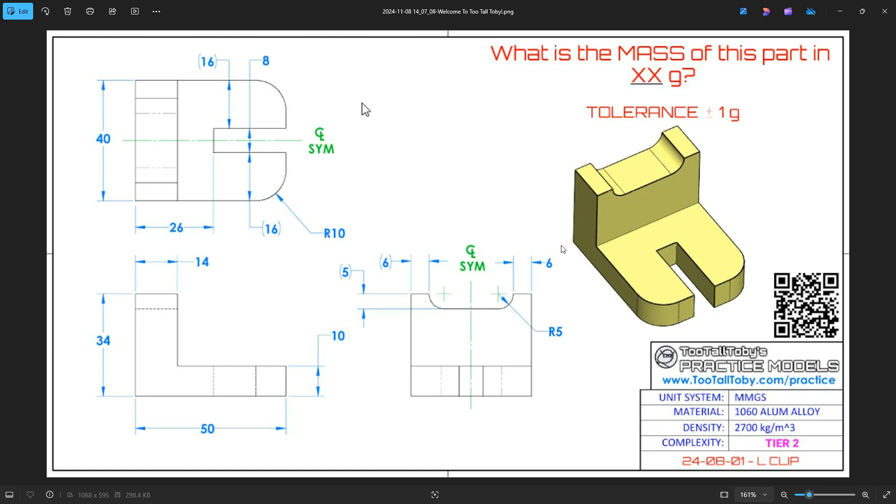We'll do this all in IronCAD. We won't use any sketches, so we'll just hop over and show you how this is done. I moved this over to the other screen so I can see the values, but basically we're going to start off with an extrude shape here.

We know the width of this is 40 millimeters, so we have a handle that's highlighted yellow there telling you which one's moving. That's going to be the width of that part. We know the length of this is 50 millimeters, so it moves to the back one, and then the top, we're going to set the base, which is 10 millimeters. So that gives us the starting point for that.

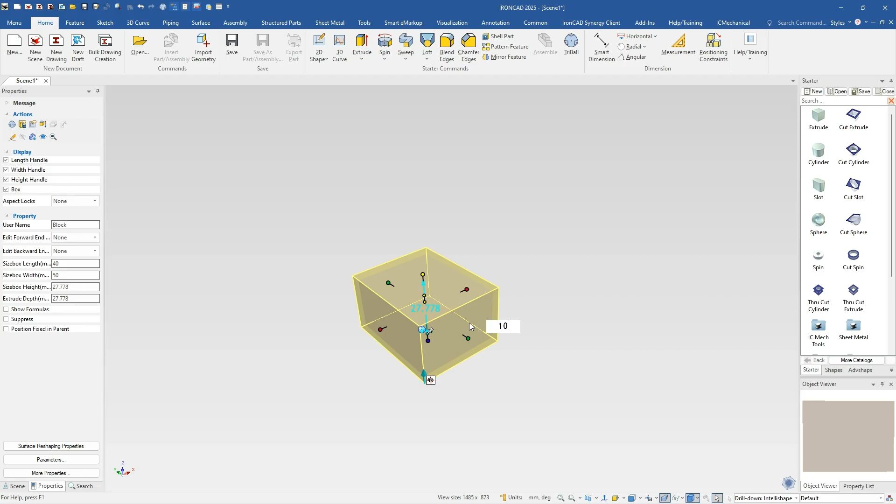We can go and drag up another shape here, then size it and snap it to everything, but there's another way to do this as well to get the extrusion on the top: just select to the face level. You'll have a handle, and you can pull that up. That's going to be basically 34 total, and we have a 10 on the bottom, so it's going to be 24 for that value.

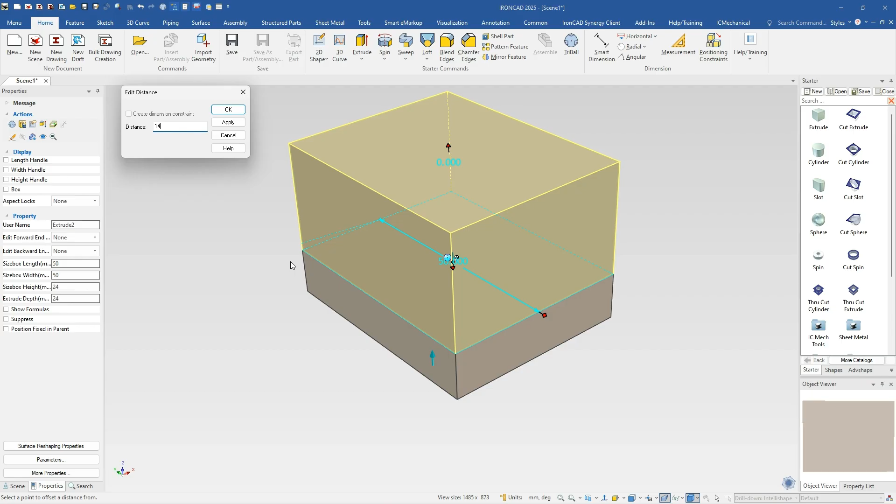Then we can take this other handle and just right click on it and say edit distance from a point, which is going to be this back edge here. We know that the thickness of this is 14 millimeters. So that's an easy way to get everything aligned up very quickly.

Next, we'll go ahead and add this cutout. I'm just going to rotate it down here a little bit so that our extrude goes down, and we're going to drop an extrude cut right on the middle of this part.

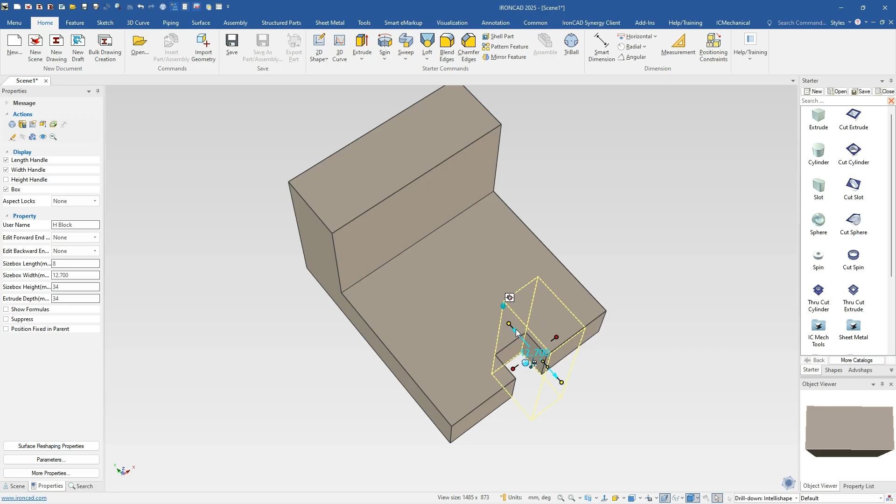We know the width of this, if we right click and size this, is going to be a width of 8 millimeters there. And we know the distance on the back side here, this back edge, is going to be a distance from a point again, same thing as before.

In this case, they gave us the 26 millimeters. So they didn't really give us this actual edge length here, they just gave us distance from here to here. So we can quickly do that with our handles.

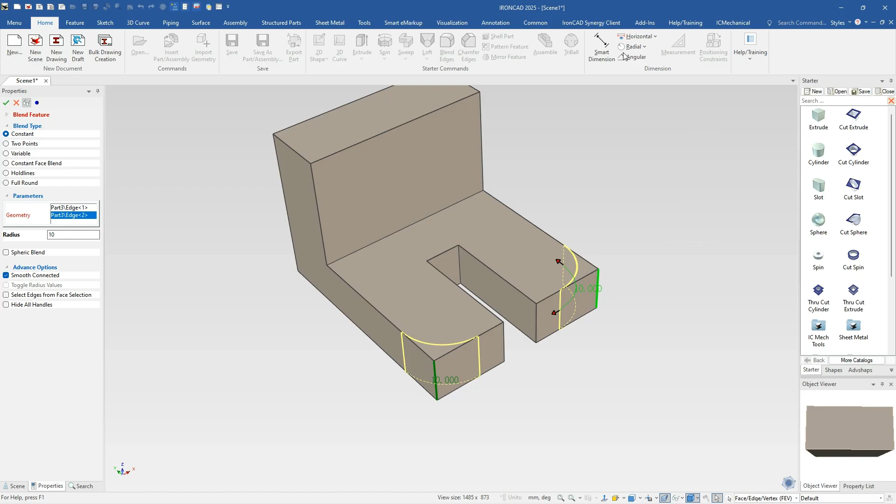Next, we'll go ahead and add our blends on the front here while we're on this. So we'll go ahead and just put a blend here, which has got a radius of 10 millimeters. We can select the other edge as well, and right click and say OK to apply that, or hit enter to apply it. Either way we'll do that.

Next, we'll go to the top and do the same thing on the cutout. We'll drop an extrude cut here, and we know the width of this thing is going to be 6 millimeters from each end. So we're just going to symmetrically pull this. When I right click and let go, I'm just going to take the 40 minus the 12, so it's going to be 28 for the width of that.

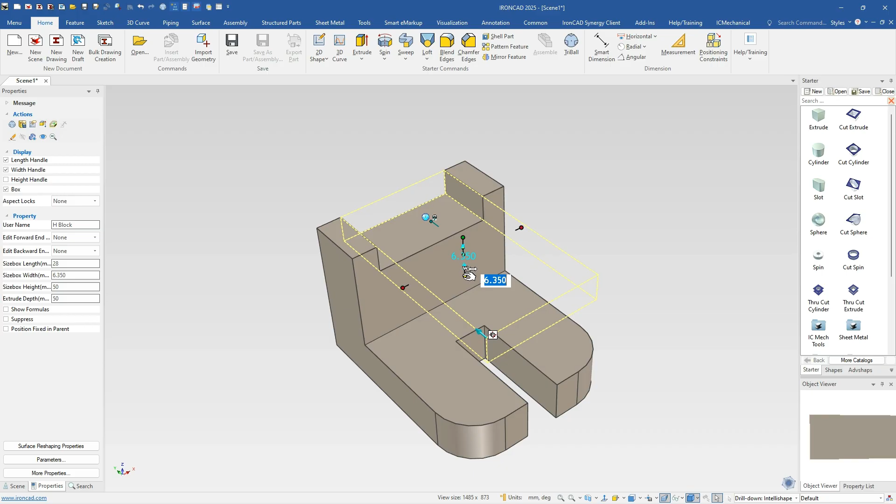Then we can snap our top handle to this edge here, which it already is, and then select our bottom handle and just tell the depth of that to be 5 millimeters. That gives us our shape fairly easily, and then we just need to go and do a blend on this.

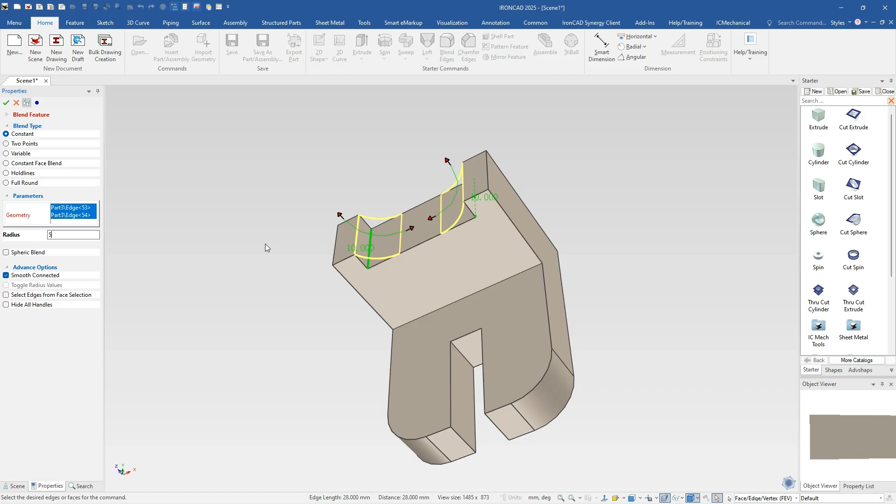We can select individual blends and then select the other one, or we can select down to that edge level, hold the shift key down, select the other, and do the blend. We can do them both at the same time, saving a little step there. This is going to be 5 millimeters for the radius. Again, you can just hit enter to get that value and hit enter again to accept the command.

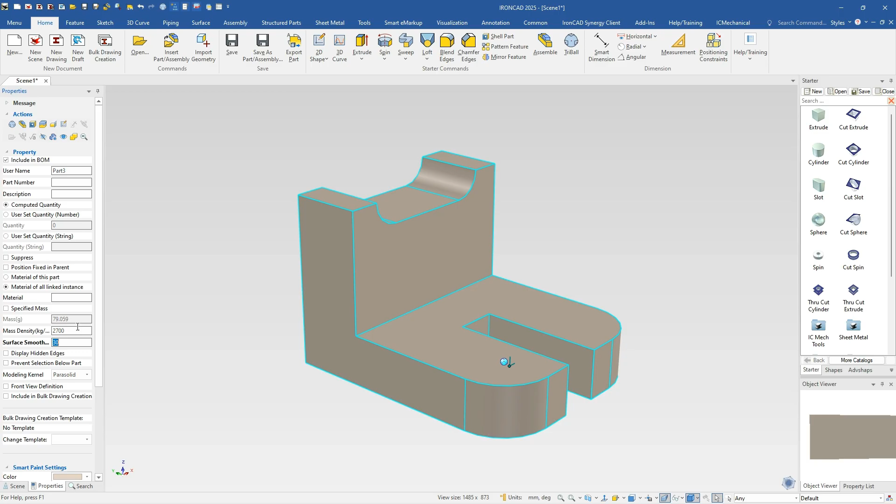So that's all it takes to build this model inside of there. If we go over to our property browsers here, we know that we have our mass in grams, and the mass density for this model is actually 2,700. We can toggle out of that, and it's going to give us a mass of 79 grams for this part.

Again, in IronCAD, fairly simple, no sketches, just drag and drop features. Really easy to do this type of work in IronCAD, as you've seen in some of the other videos. Hopefully you find this useful, and we'll continue with the next video.